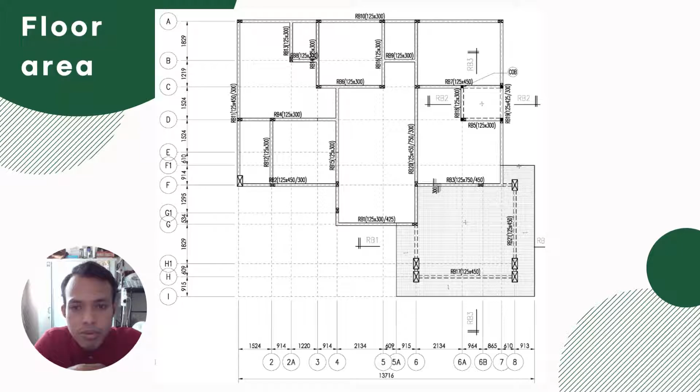So this is the plan of the house or the building, and we need to look at the building measurement, not the outside. This is the floor area method calculation. For floor area, we need to calculate the area of the inside of the building, so we need to subtract the wall thickness.

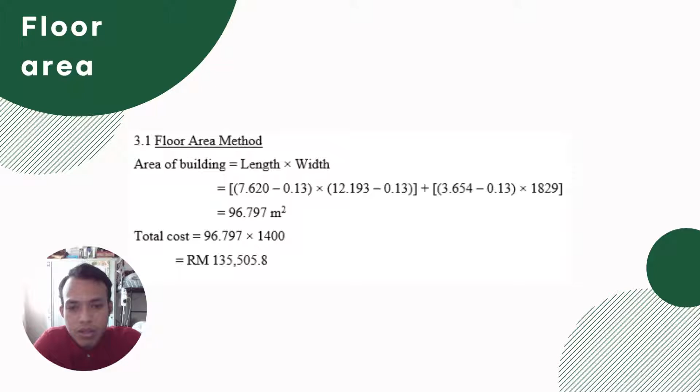For the volume method, we need to measure the external measurement of the building, so we need to add the thickness of the wall. Then for the height of the roof, we need to divide it by 2 because it is a pitch roof. Then when we get the volume, we multiply by the price rate.

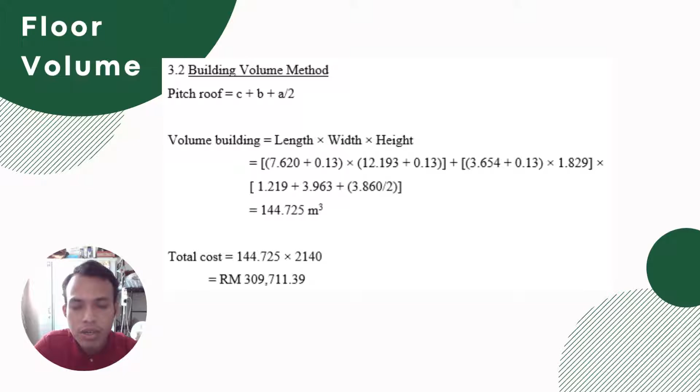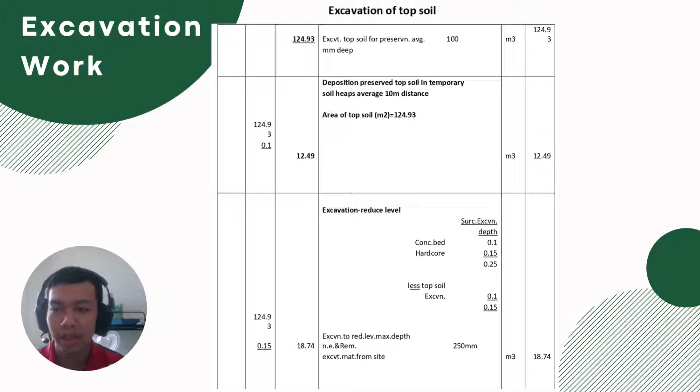Next, the slide shows the calculation for excavation. Firstly, we need to find excavation for topsoil. We need to know the excavation of topsoil for preservation, average 100 mm deep. Second, we need to know the deposition of preserved topsoil in temporary soil heaps, average 10 meter distance. And we need to know excavation to reduce level, which means excavate to reduce level maximum depth 250 mm, and removal of excavated material from site.

Next is the calculation for excavation pad footing. We need to know excavation pit to receive column base, starting from reduced level maximum depth 1 m, and filling to excavation with material arising from excavation. We need to find this for F2, F3 and F4. Second, we need excavation with material arising from excavation, extra over pit excavation for excavating in rock. We also need to find this for F2, F3 and F4.

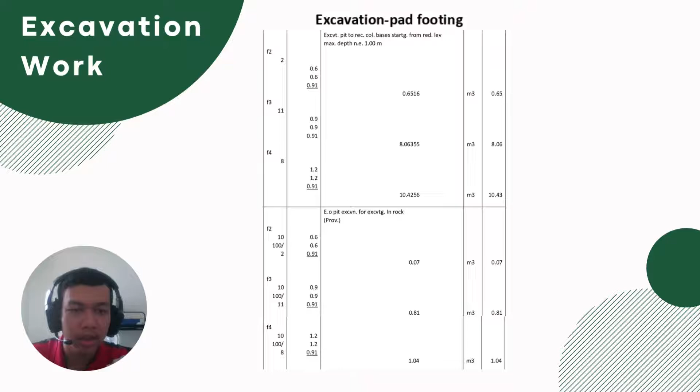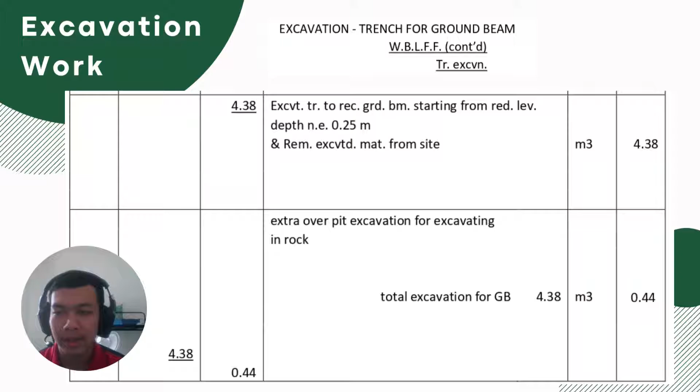Next, for excavation trench for ground beam. Firstly, we need to calculate excavation trench to receive ground beam, starting from reduced level depth 0.25 m, and removal of excavated material from site. Second, extra over pit excavation for excavating in rock.

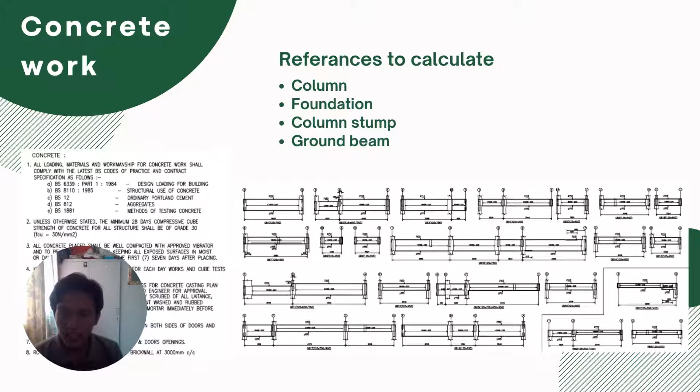Hi, I would like to continue with taking off for concrete work. For concrete work, we calculate taking off for column, foundation, column stump and ground beam by referring to concrete detail from beam detail and structure plan.

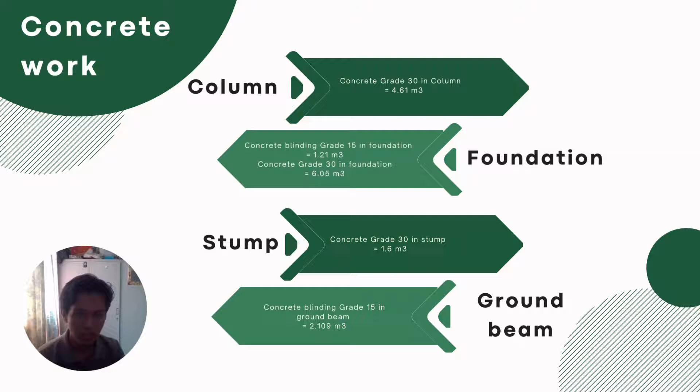After calculating taking off for concrete work: for column, concrete grade 30 is 4.61 meter cube; for foundation, concrete blinding grade 15 is 1.21 meter cube, and concrete grade 30 is 6.05 meter cube. For the stump, concrete grade 30 is 1.6 meter cube. And the last one, for ground beam, concrete blinding grade 15 is 2.109 meter cube. That's all.

Okay, next I would like to explain the reinforcement scale calculation. We have to know what is reinforcement. Reinforcement is estimation of steel reinforcement quantity, a necessary step in calculating cost of RCC structure along with other building materials as per construction drawing.

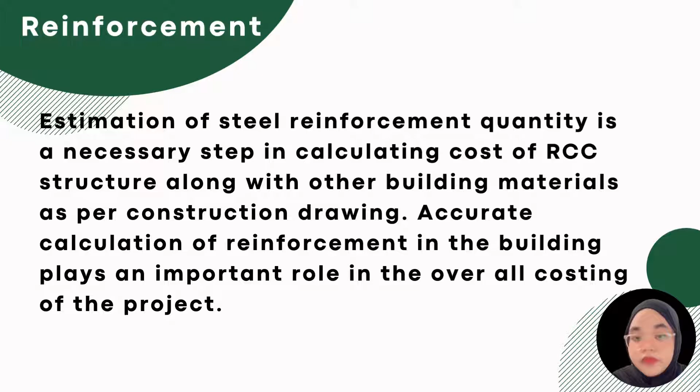For the pad footing length, we have 3 pad footings, F1, F2, and F3. The length of pad footing 1 is 0.6516, pad footing 2 is 8.0635, and pad footing 3 is 10.425. This amount we can get from the calculation from excavation.

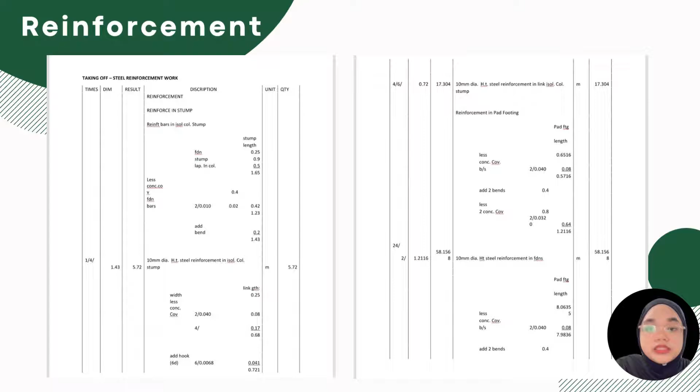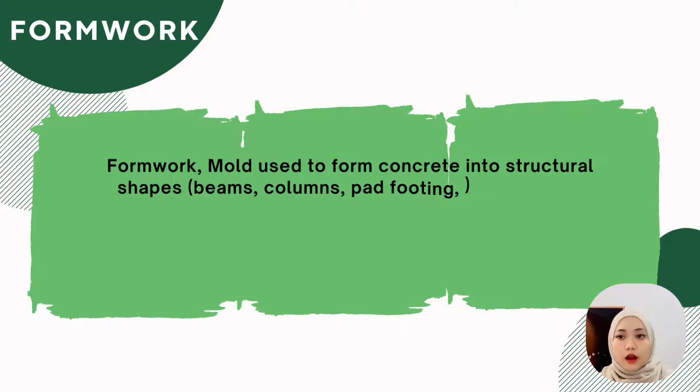What is formwork for construction? Formwork for construction is used to form concrete into structure shapes like beam, pad footing, column, and so on. So for building, formwork can be of timber, steel, plastic, or fiberglass. The inside surface is coated with a bond breaker, plastic, or oil to keep the concrete from sticking to the mold.

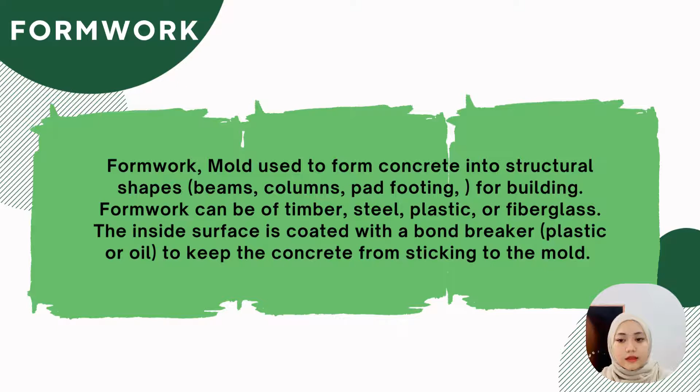This is important for high rise construction: slip forming, whereby a vertical concrete element is continuously cast using a short section of formwork that is repeatedly disassembled and moved upward as each section is finished, moving slowly and continuously.

So for this project, I'll calculate formwork for pad footing, column and beam. For column, we have column and column stump, and also for beam we have ground beam, roof beam and tank roof beam.

So this is an example drawing plan. For pad footing, as you can see, we have 4 types of pad footing with different sizes. I refer the tables and size for each pad footing.

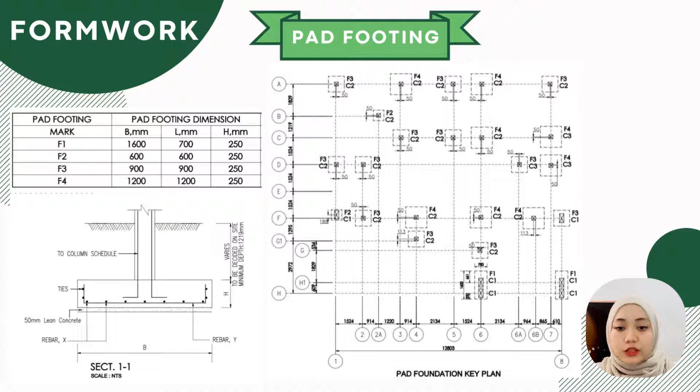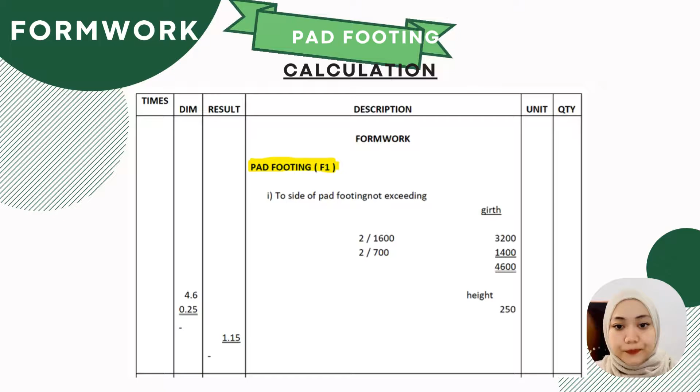And for pad footing calculation, this is an example of pad footing calculation for this project. This is an example table for pad footing.

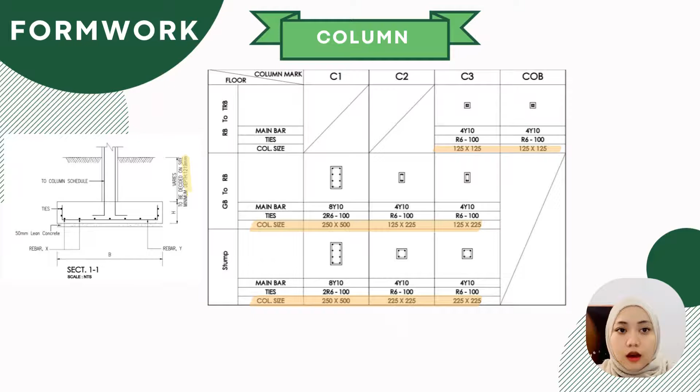So I refer this table to calculate the size of a column. We have different sizes. Just refer this size to identify the size of formwork. This is an example calculation for columns, so you can refer this table.

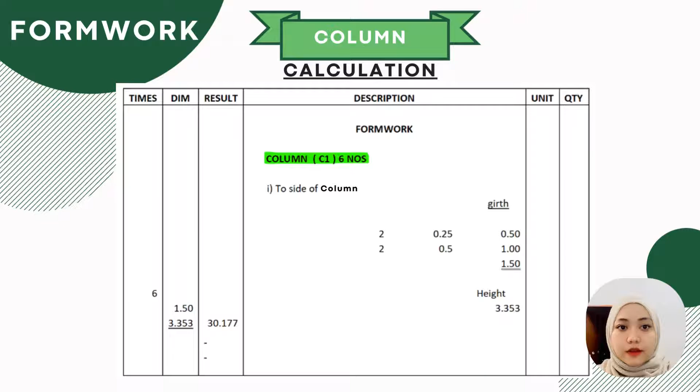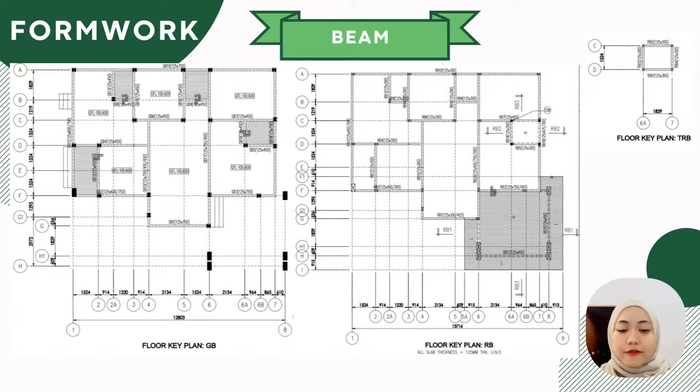So this is for beam. I will refer this drawing to identify the size for beam. We have 3 pieces of information: floor key plan for ground beam, floor key plan for roof beam, and floor key plan for tank roof beam. TRB means tank roof beam.

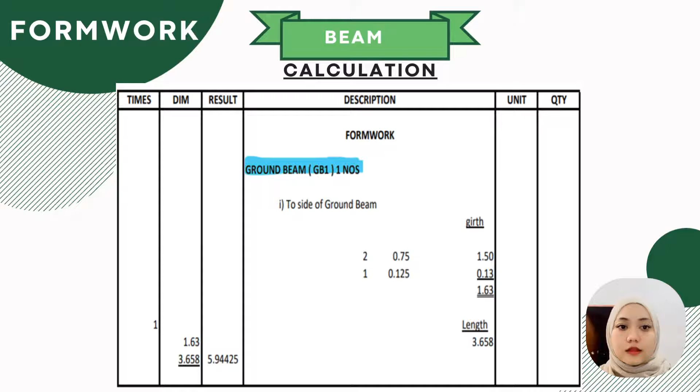This is an example calculation, I just take one example here, for calculation of beam. You can refer the girths, the length and so on. Thank you.

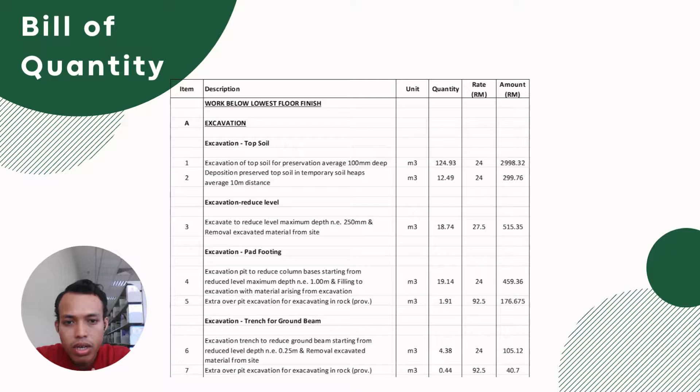Next is bill of quantity, or BQ. For the excavation work, we just total up the work and then multiply the rate. After that, we do the same for concreting work and formwork. Then for steel reinforcement, we need to convert the unit from meter to kilogram, and multiply by the price rate.

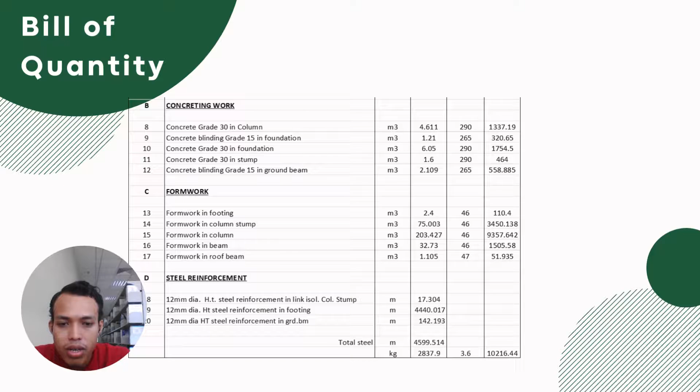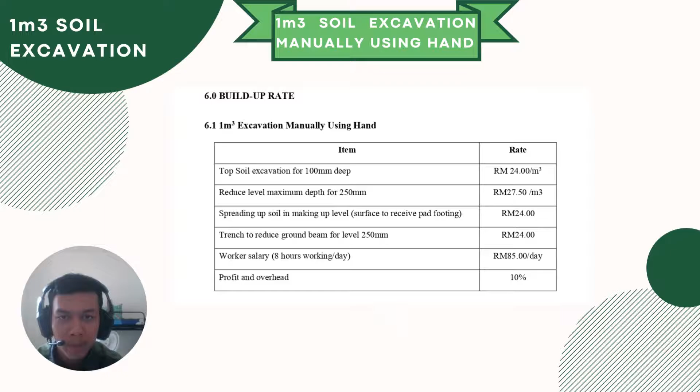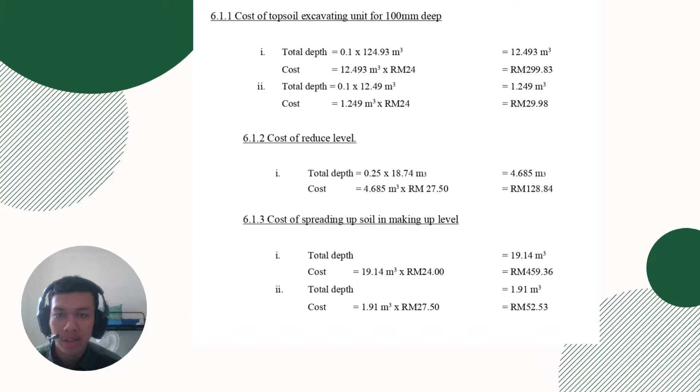Next, this is about 1 meter cube soil excavation manually using hand. Above we can see the rate of price for every item. For the calculation, firstly we must find the cost of soil excavation per 100mm deep. Second, cost of reduced level, and third is cost of spreading soil in making up level.

Next is total up cost of trench to reduce ground beam, and next price of worker salary, and lastly for profit. For the total of 1 meter cube of excavation manually using hand, we got 1,203 ringgit 31 cent for the 1 meter cube excavation price.

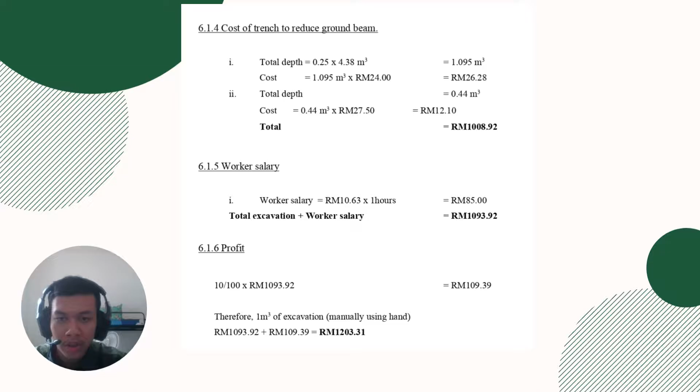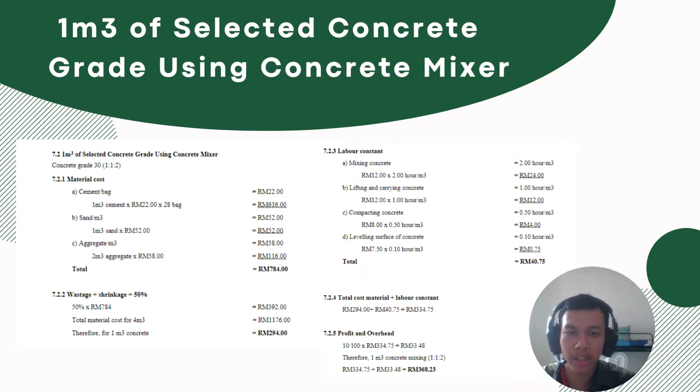We calculate total cost as material cost plus labor constant, getting RM334.75. For profit and overhead, we got RM33.48. Next is performance bond and liquidated ascertained damage, or LAD.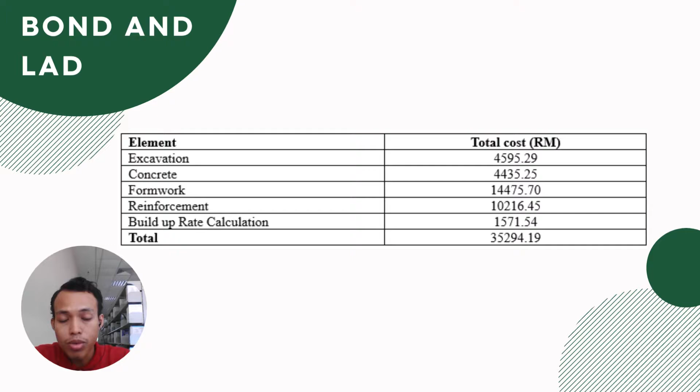First we need to find the total cost from the BQ and from the build up rate. For the performance bond, we find 5% of the total, and for the liquidated ascertained damage, we find 6.7% of the total based on the base lending rate of RHB Bank Berhad, then divide by 365 days in a year to get the price rate per day.